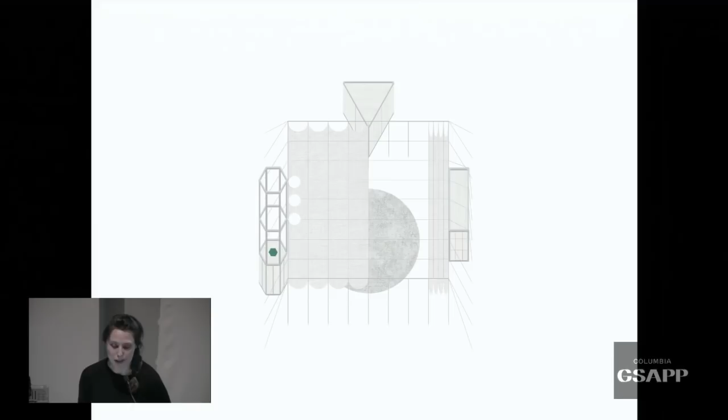The decorators designed pieces. As you can see here, these objects can open and scatter pieces of furniture around, which then populate the space for different activities. The roof can open and close.

So at night, that would become also the screen for the light to come through.

So this is the distillation tower, which is a bit of an ambiguous object. On one side it's a landmark visible from very far away, then it's like a chemical laboratory where everything around the festival happens, and it's also the support for the lamp.

This object closes at night and becomes totally white, and when it opens, it reveals the color. The same is true for the other objects.

So here you see the relationship with the essential garden that was created in front of the pavilion, which nourished the festival itself as a primary material.

During the festival, a lot of things happened, like essential plant courses about how to cultivate them, use them, distillate them. The roof could open and close according to weather conditions. There were also kitchen courses and classes.

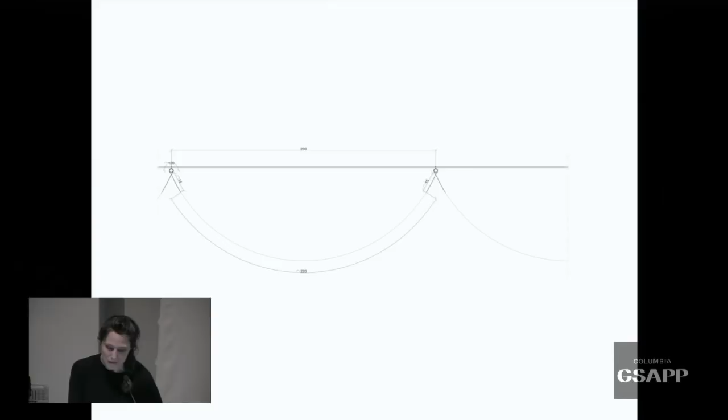So, in a way, to go more in detail into that, the elements are just this roof with this perimeter. The roof is this white fabric, very simple, just to protect from the rain. It has few features in the sense that as a white element, it looks really like a cutout. So it really cuts out the landscape from the inside. It really becomes like a view.

And at the same time, while being a fabric, it's very much alive. So it really reacts to the weather conditions, which is also very nice.

And then there is the kiosk. The kiosk is a reinterpretation of the former one, in a way that it had to become more stable, for obvious reason, because it has to be dismantled and rebuilt every year, but also built in very little time. So it's really done with these panels, which are just attached to a very thin metal structure, and these panels are framed with a metal frame, which then defines the drawing of the pavilion.

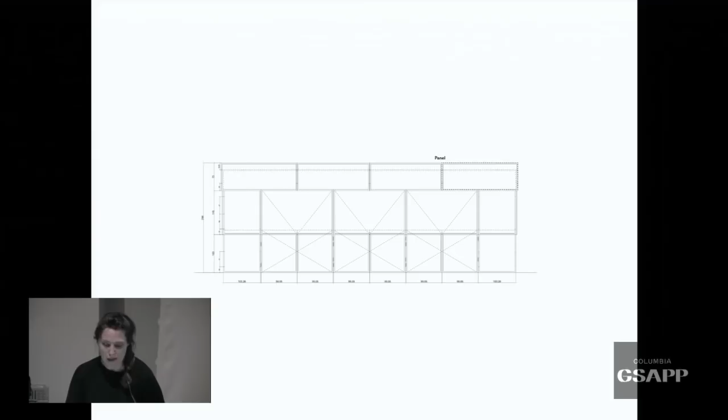When it's closed, it looks all the same, and then, as you see here, the pavilion opens on one side, and the bar comes out. So you see it here in the blue pavilion. It really changed a lot, the fact that there is this intense color on one side. It really gives something else, which makes the difference from when it's open to when it's closed.

And inside, every single object, even the sausage, is colored in the same color. Here you see also these both details.

The roof was really manually done, very much low tech, so that to open it and close it, you would need a few people on one side and a few on the other, and these cables would be the way to move it.

So the back of the pavilion, but here you see also, so there is the roof, there is the canopy, the kiosk, and then there are a few little features, objects which populate the space.

Here, the lamp as a landscape, which substitutes as a landmark for the tower of the previous festival pavilion.

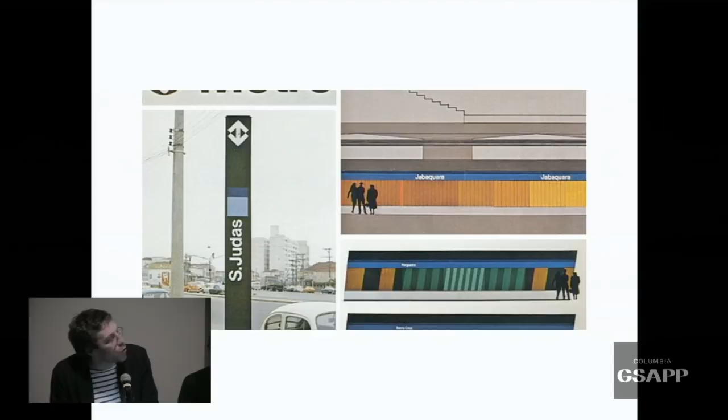This project had a big success, the project of the Milano Metro, because Bob Noorda, as a designer, was then asked to design the Metro of São Paulo in Brazil. And you can see that despite more Brazilian colors and patterns, the project is quite similar.

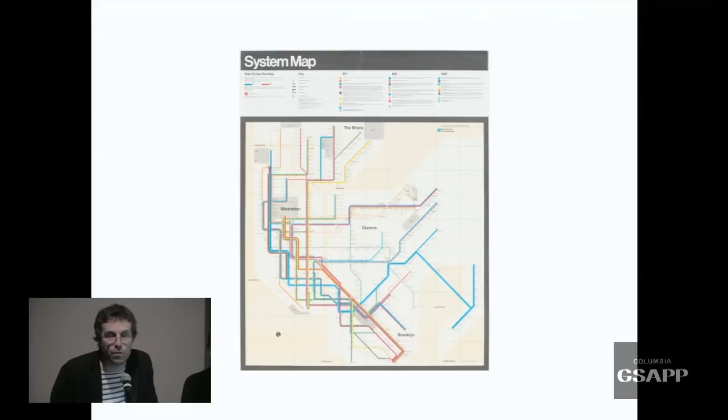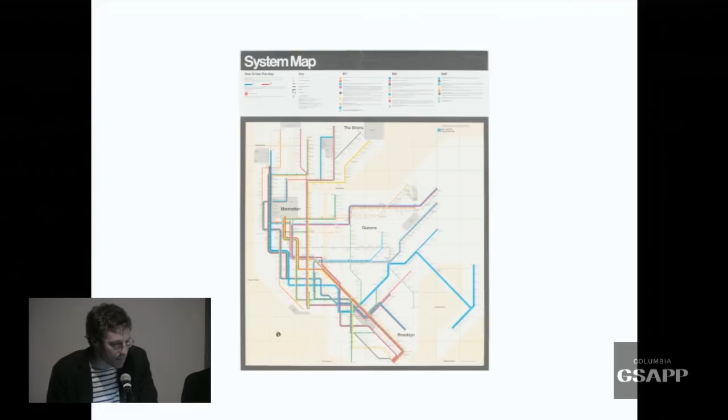And to add another little step to this, Bob Noorda, together with Massimo Vignelli, founded the Unimark International Office. And the reason why Unimark Office was asked by the MTA to design the metro map of New York was because of Bob Noorda's work. So if you look carefully, you see many assonances among this project, the project of the metro you take every day, and the initial metro of Milano. So for us, that project, the Milano one, is extremely important.

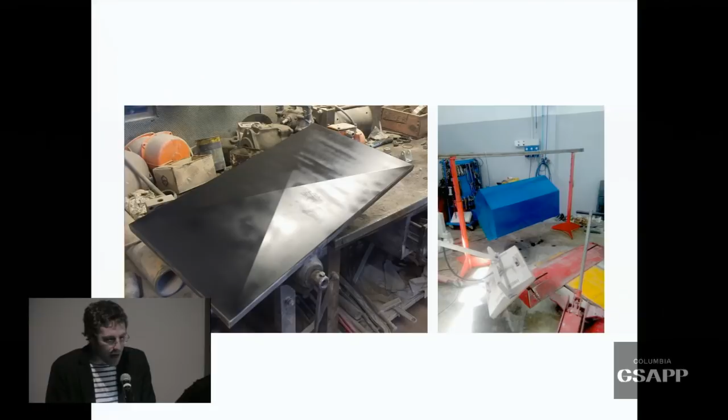We found another material we liked very much and were interested in, used only in one station for historical reasons—this blue embossed metal panel—and out of that we made the project of a small cabinet.

And then to finish, the signature railing of the Milan Metro, which is really the signature of the Albini Helg project—this red line, part of the first red line of the Metropolitana Milanese, which brings the user almost to the train, always ending with this special curve. Out of that, we decided to create a lamp, and this is the project of the lamp.

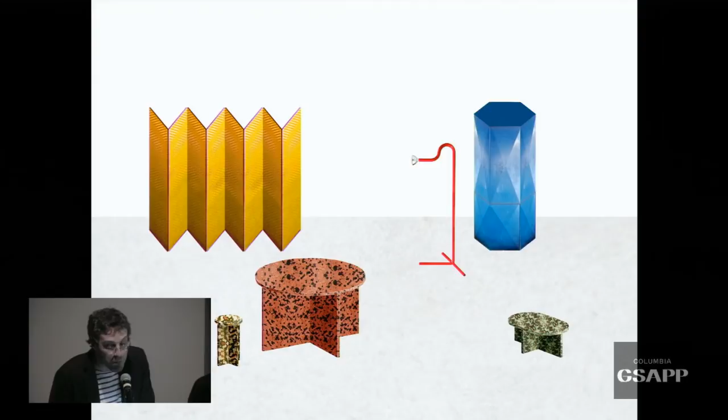These are the family, let's say, this series of furniture which somehow condenses this urban project of Albini, Helg, and Noorda into a sort of domestic environment. And this is the project in place in Chicago, how it was realized, together with a good company of Point Supreme's Totem on the back, which I think is not a coincidence—there were some resonances between the two.

The lamp, together with the pictures by Giovanna Silva, the survey she did with us in the metro, the lamp, together with other objects, the folding screen, the table, and the cabinet.

We are extremely happy about this project, about the result, which we finally saw only in Chicago. And we are happy because these objects will be realized again and distributed by the Maniera Gallery in Brussels. So somehow the Biennale project found a sort of continuation afterwards.

Actually, the reason for this Maniera collaboration came from another project, a much smaller one, which almost with the same timing made us work together. In the fall of 2017 the gallery was invited by an Italian institution connected with the Torino Art Fair to be present with some designers they had to select—in this case, us.

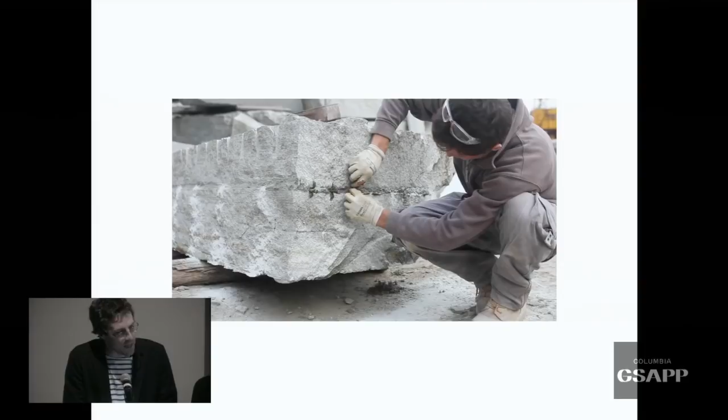This is how the stone comes to the stonecutter's atelier, in big blocks, and this is how they open it. First they have to break it manually, putting in some wedges which expand and make the stone break at its weak point. And this is the stone where it breaks.

What we were interested in, having spent some days there, was the quality of the stone specifically in the surfaces which were manually cut. Normally those surfaces are discarded by the stonecutter because they're not perfect—they just saw the block and discard this part.

The result is this surface, which because of the break, is extremely bright. It contains a lot of metal, and it shines under the sun. When you cut it with a saw, the stone doesn't shine anymore. So we were extremely interested—we had to work hard to convince the stonecutter to keep this surface.

In order to make a set of objects, like a set of monolithic pieces, we were interested in working this block almost as a set of geological samples—like what you get when you dig the ground with a machine and take out a cylindrical piece of earth. So we wanted to take this block and excavate it somehow, keeping the quality of the upper surface while also excavating the legs.

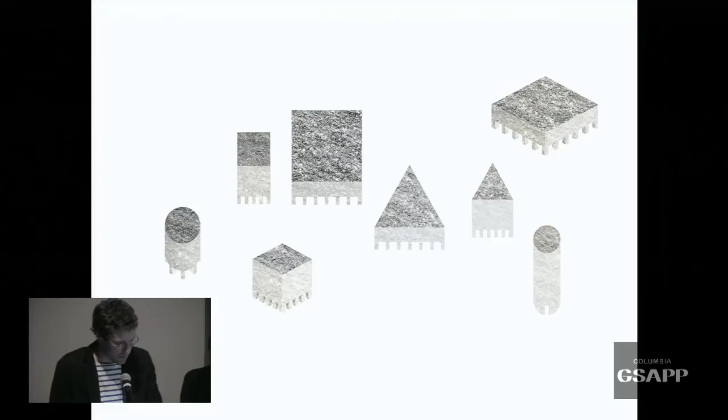I'll show you some pictures. This is part of the work. And the way in which this monolithic object touches the ground is also worked out of the same block—it's excavated out. This set of volumes, when put together, somehow twist into something else.

We like to think of them almost as micro models, or as micro buildings. So when we did this project, we thought about how they could compose an urban environment, even at the small scale they are.

These images show a little the difference between the upper surface, which is bright, and the surface of the sides, which is cut with the saw and shows all the layering of the stone. And this is the bottom of one of the pieces.

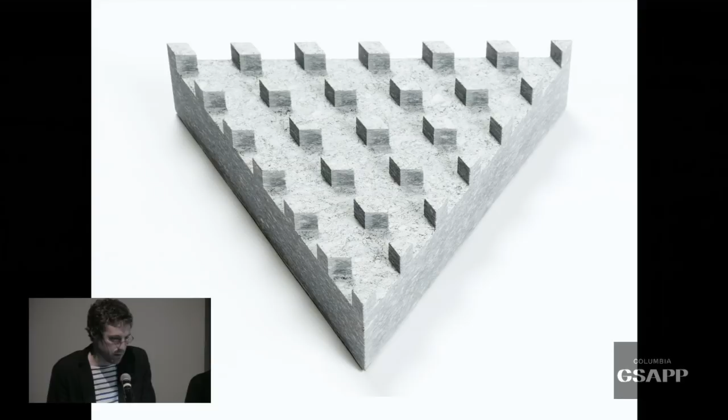So here we are going to introduce this project, which is an ongoing project, which we are going to present as a finished product by June, more or less. So here what we are showing is the first approach to the project, which was a competition that we won 2 years ago, I think.

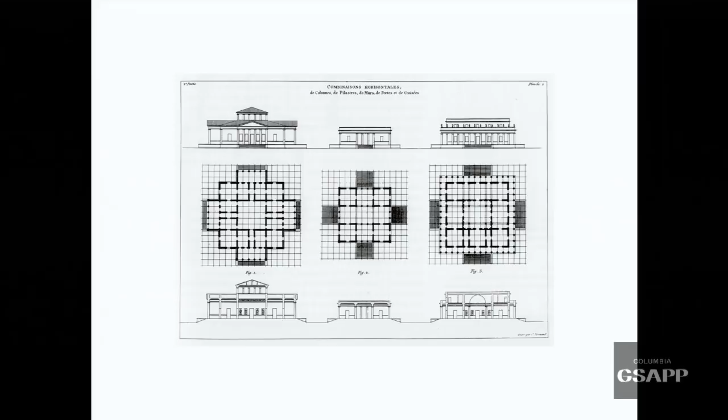The project is, in a way, how to build a house as a product of industry, and it's a very strange question because the question is how to build a house which doesn't have a context yet, doesn't have a place yet, and what to do with that.

So it's a house in which, to make it, you have to focus on the inner qualities of it. The project is, in a way, research on types and how these types can evolve, compress, expand, how they can adapt, and what this type is, and what are the inherent qualities of the spaces we create.

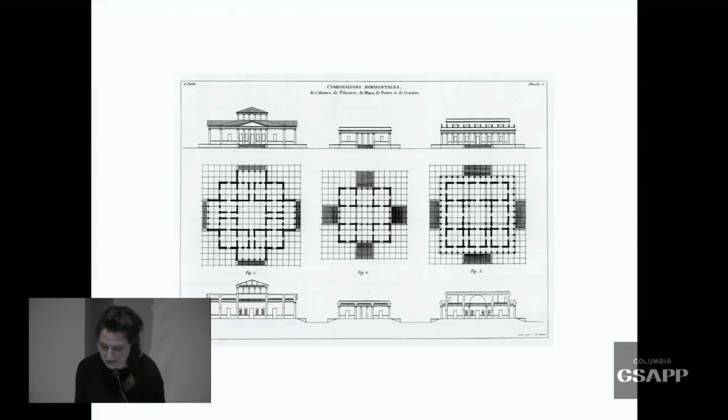This is an image of Durand, Les Précis des Leçons d'Architecture, and it's just a starting point.

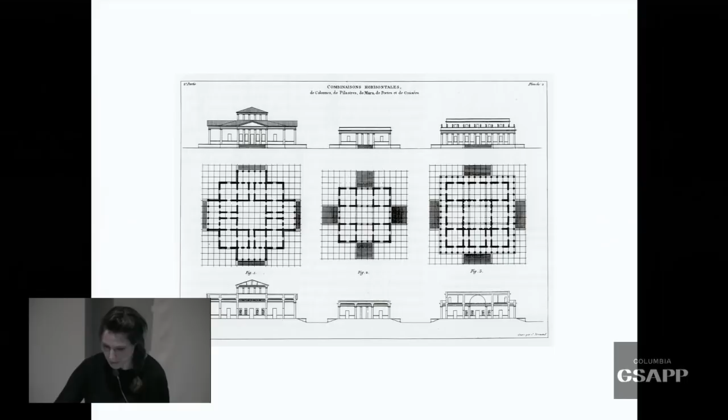Mainly, also to make a prefab house which doesn't have a client yet is an open question, because it doesn't really have qualities yet. You don't know what have to be the qualities of this space. It cannot be so specific, because this house has to be prepared for an X client, and we don't know what are the questions behind that.

So for us what was important was to create a space which we call neutral space, a space which is big enough and simple enough to host whatever. It's a space which, in a way, can be transformed through time. Also, if the house evolves, if someone else comes to live in it, it can be a space that takes other functions, and can also host the same functions at the same time.

But to do that, you also need to create spaces which are very defined, and that also inform the neutral space with the basic uses of the house. These spaces we call the edges, so the borders or edges.

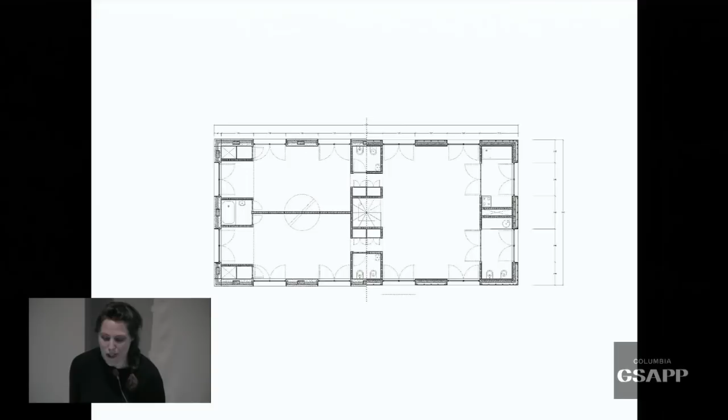And we imagine this house to be the connection of two spaces: a space which is very undefined, and spaces which are very compressed on the border of it, which are really specific, so which at the end could be kitchens, bathrooms, but also beds. So this is the first typology we had done: two big spaces, and in between, these spaces were always framed by these other smaller spaces.

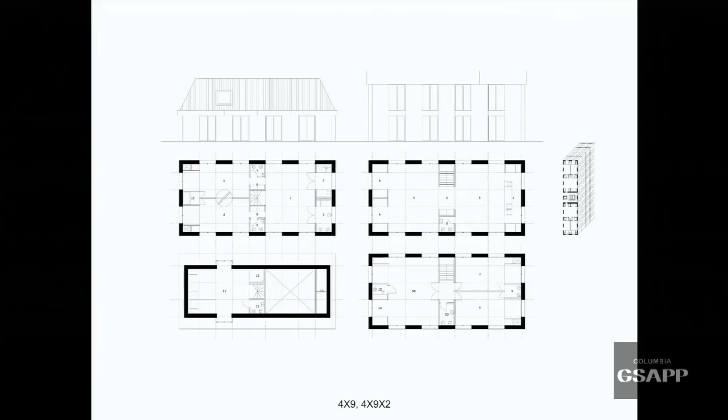On the roof, another space, of course, bedroom. So it's just one floor plus roof, but this, which you see on the left, could also become two floors. So the same room, the same typology, which has the peculiarity of facing two sides, could be one or two floors, with or without roof.

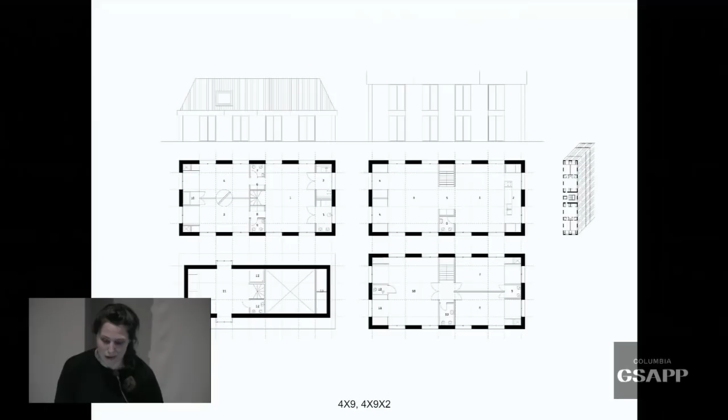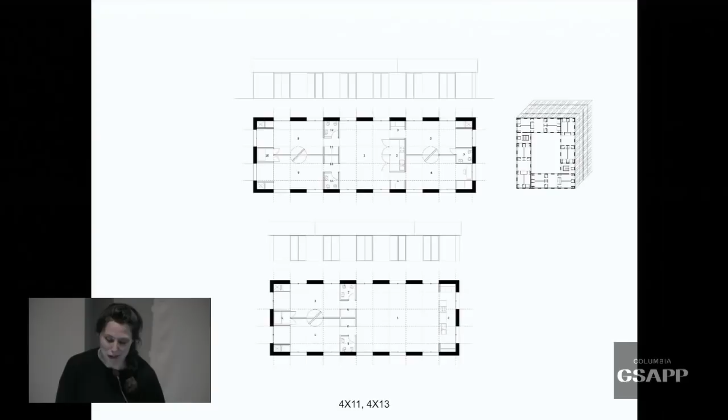It opens possibilities. On the right you see these small buildings. It could even suggest that it could become a bar, a building, made out of these typological apartments. So this is the expanded version of it. Instead of two neutral spaces, we have many more, smaller, bigger, very on the lower part, a luxurious house with a gigantic space and smaller spaces on the side, or a symmetric one. So just investigation on what this idea could bring to.

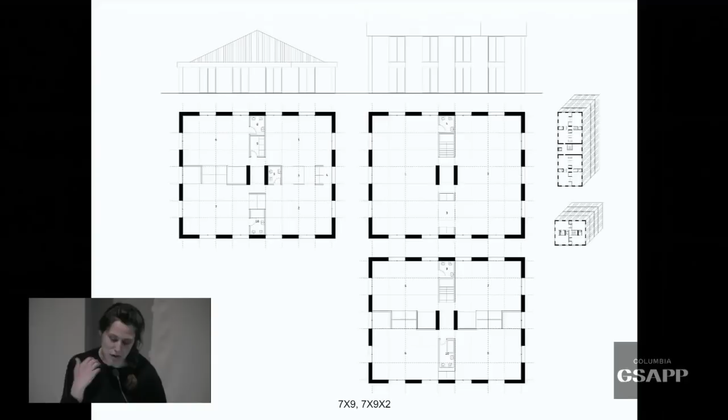This is the cross type. It's a big space which is organized on a cross, and which could be one floor, two floors, create a tower, create a bar. And then the mono-directional one, which would be possible to build towards a wall or with a very main view.

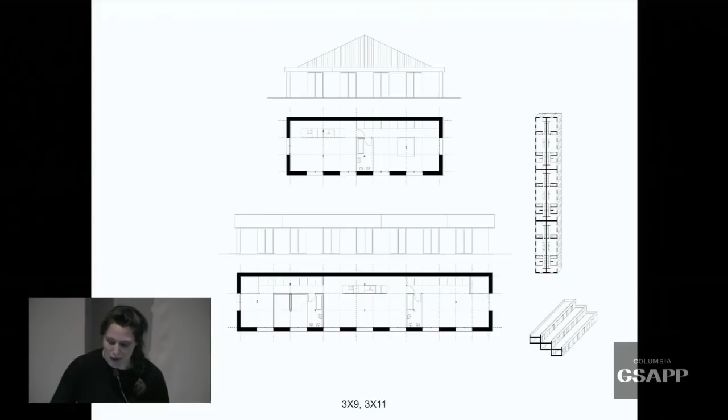This could also evolve in the same way, so it would have these edges on the back defining and dividing the main spaces. And this could also become, if you think about it, putting them together, housing on a slope, or almost like a fabric of buildings.

This is a project which is the first time we present it, because it opened last week. So we also have very few pictures, and in a way we still cannot show it in its full use. It was a commission from the Beaux-Arts in Brussels on the occasion of their exhibition on Fernand Léger, which opened a few weeks ago.

And they asked, because of Léger and his period in which he painted mainly circuses, to make a space in front of the Beaux-Arts for circus activities, but in a larger term.

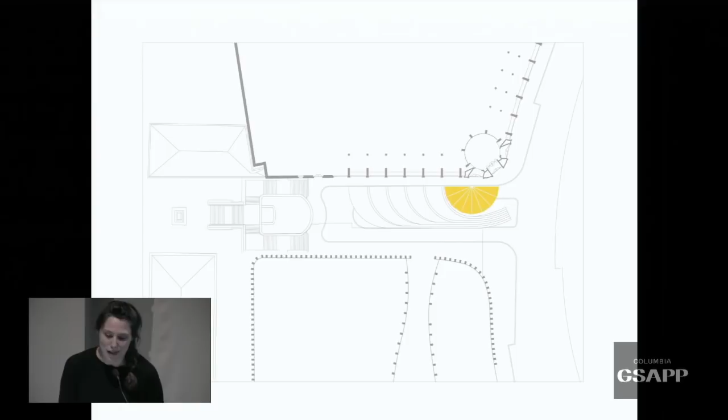But so, in a way, in this very narrow plot, the only solution possible was to make a half circus, which was fitting and giving this idea of grandeur, but not really being so big, fitting this narrow plot. And also because in this plan you can see the intervention which will come, the landscape intervention which will come in the next months, so even there it could fit in the leftover space of this landscape intervention.

So it's a project which, at the moment, has been built in this way, but in the future can be built again in the next phase of the plot.

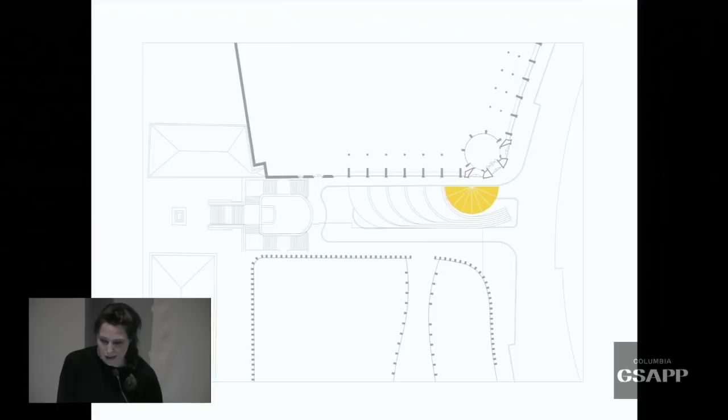So this is the structure. In a way, it was also very complicated. A circus always has these tension cables, but the site was such that it was not possible to put tension cables to build with this kind of structure proper to the circus. So the project became a structure which lays on its own, resting on a socle, a socle which makes the very sloped ground flat, and which also has very strong foundations out of concrete.

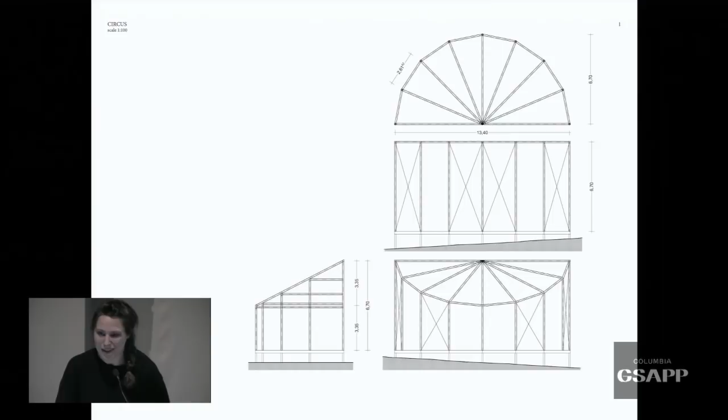Now I talk about meters, but okay, it's 14 meters, 7 meter radius. And then there is this skin which completely covers it, made of the same fabric as the circuses.

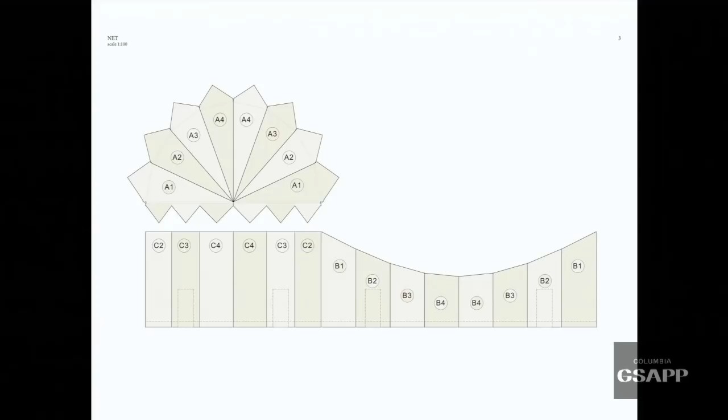So the question was how, with the smallest intervention, to create a pavilion which would give the idea of a circus, since the circus was not really possible to build there. So it was this half circus and this slope of the roof, and the fabric would be done in stripes, very light stripes, and we will explain later why.

Beside these stripes, there would be a few objects which would populate it, or express it more. So the entrance would be an enlightened entrance. The star would be the landmark to say 'I'm here,' and then some signals and so on.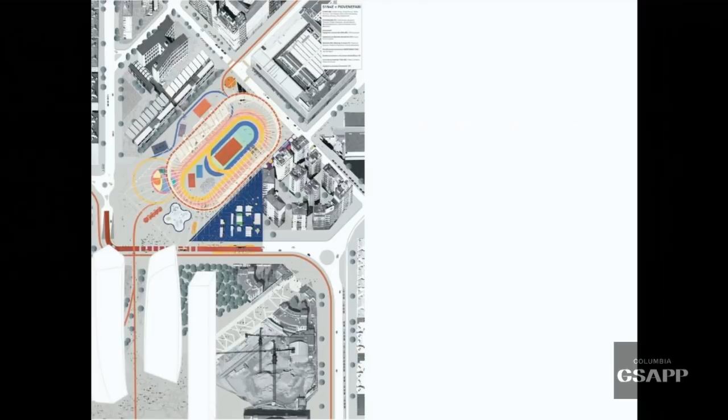So you see here the intervention, again here, the same school which is now connected. This is the inside of the stadium with the tracks we designed. As you see, the three towers here are the development I was talking about. And all these red lines are the official bike tracks of the municipality of Milano, which we connected with a series of other tracks we designed. So somehow official tracks become playful paths in this case.

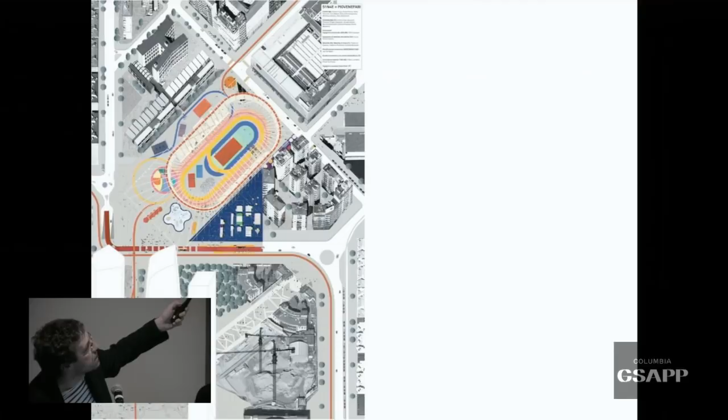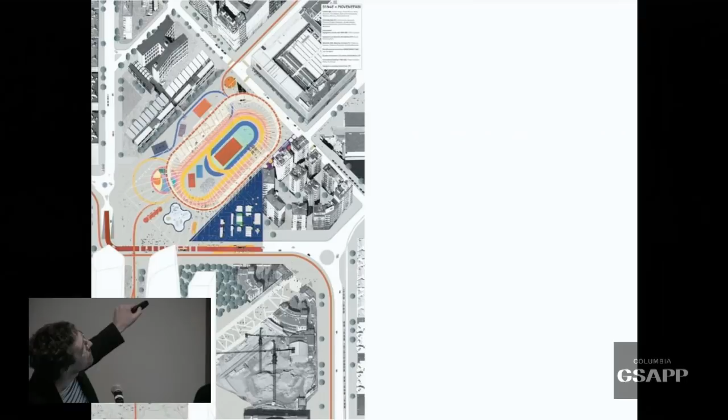At the same time, inside this stadium, there is still the possibility to do official sports. This is our idea, and this is a bit of the light. You see all the roof that covers the area. This is a zoom where you see what kind of activities we envisage.

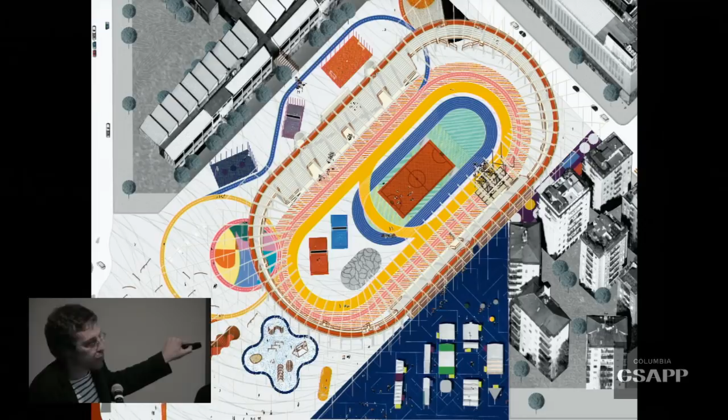So apart from the skate park, the playground, and the school, there's a kind of police school for the kids to learn how to bike on the streets of Milano, very dangerous streets of Milano, and inside all the tracks, and also an infrastructural area on the roof which could serve as support for small concerts, for example.

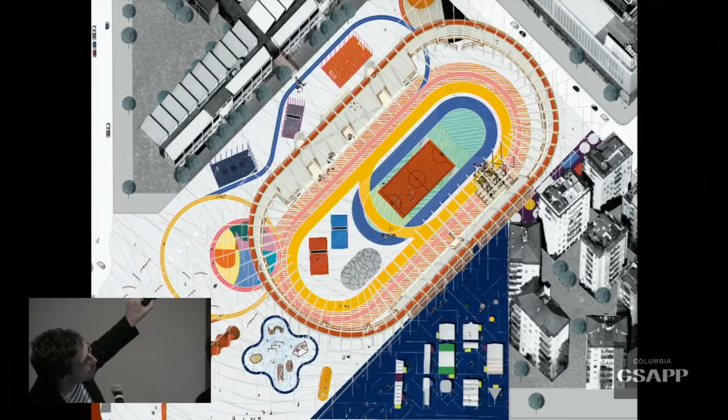And here the fields close by the school. So the idea was also that the school could get a new gym, a very big one, for the sports.

This is a zoom on the market area, also with a big project of diverting the traffic from that street to another street. We did this with some mobility engineers in order to really connect the public spaces.

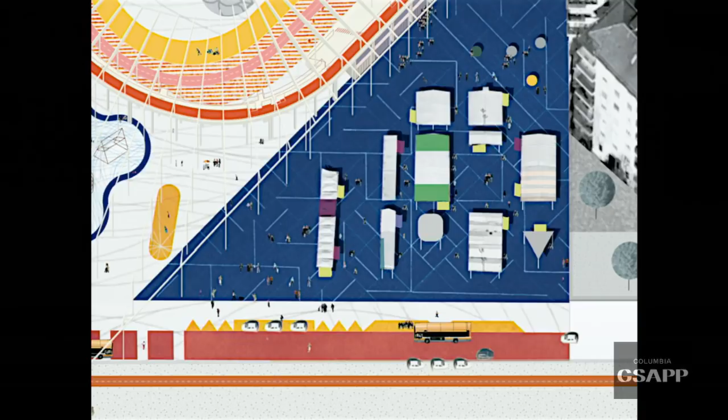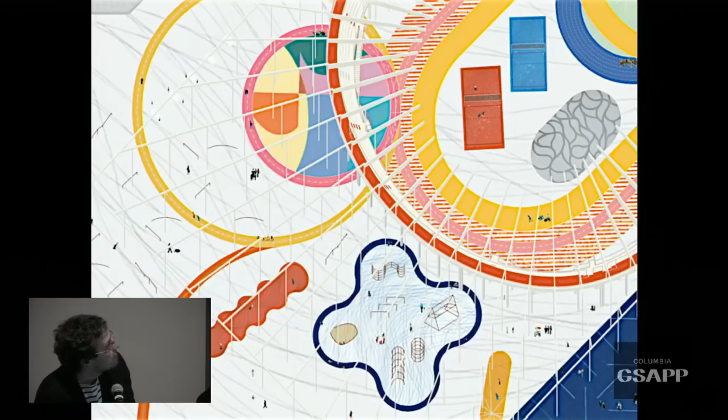The concert I was talking about, there, while there is a bike polo match in the middle of the stadium, and here again the playground.

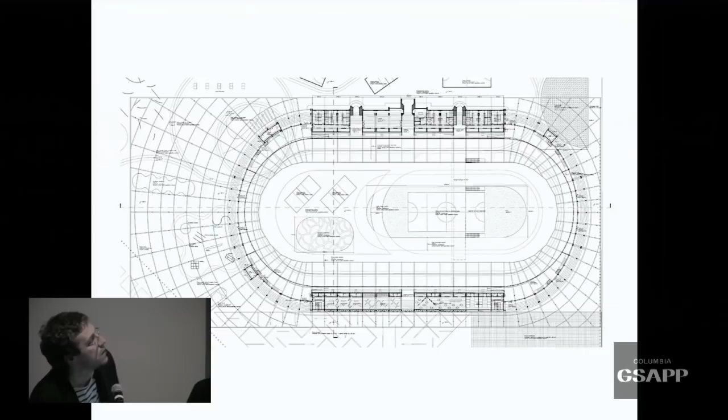So this is the plan of the project. Of course, we liberated all the curved part, so this becomes completely accessible, and on the straight part under the seats, we have foreseen on this side a gym which actually is already there - there is a very nice gym, an abandoned one. We provided changing rooms for the schools and for the city, so people who want to come there and do sports and start to run could use this area. A little hostel, a bike repairing shop, and a cafe. So this is somehow the social mix of activities that we have foreseen for the project.

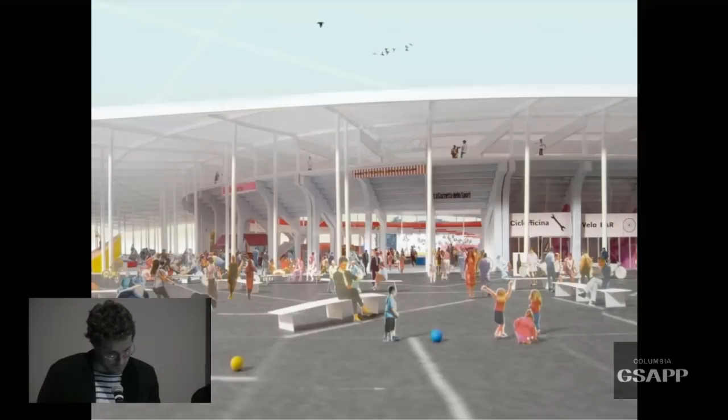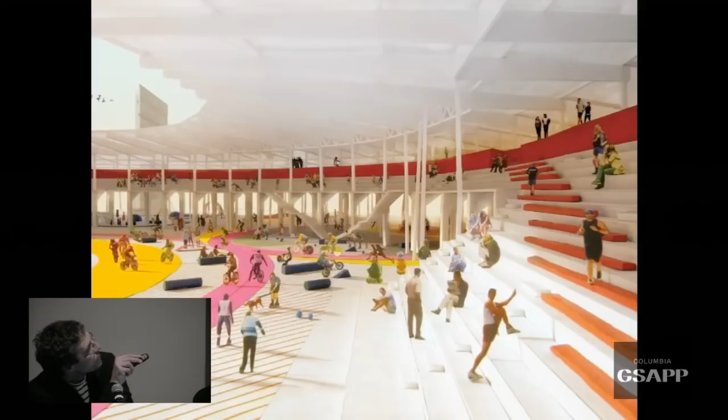And this is the inside with the tracks I've talked about before. So some official tracks and some non-official tracks that become kind of playful paths. But also this red thread here is a running track, a way to access a panoramic running track on the top, which runs on the top ring of the stadium.

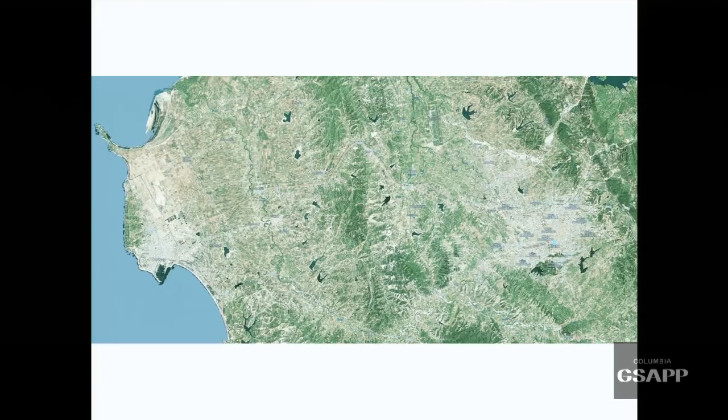And this is the wrong title for the project to come - sorry, it's not the Vigorelli Milano, it's an ongoing project we are working on in Albania. It's more a project which starts from a territorial vision, but the result is a series of small interventions.

So the bigger scale starts here - sorry, I did this wrong. Tirana, Durres, and then the road which connects the two. The road which connects the two is called Durana, which is a kind of never-ending construction of informal housing and illegal buildings. So if we go on here, that's the first stretch of road, which starts from Tirana.

So that was the piece in which we were in charge to work on. What I didn't mention before is the fact that what you see here is also a punctuation of lakes, which were not natural lakes, but artificial lakes, made as a production reservoir, an agricultural reservoir, during the communist regime.

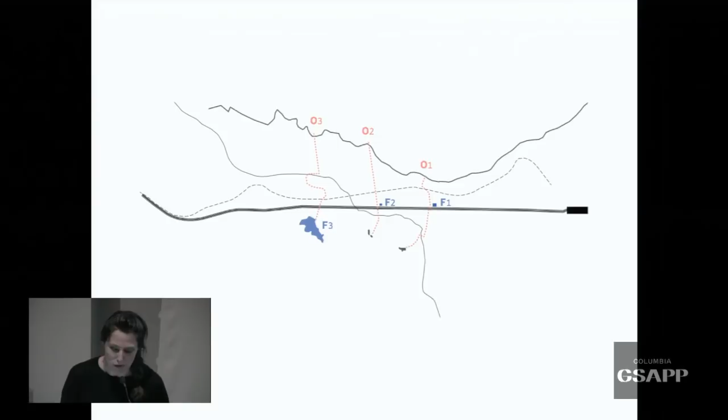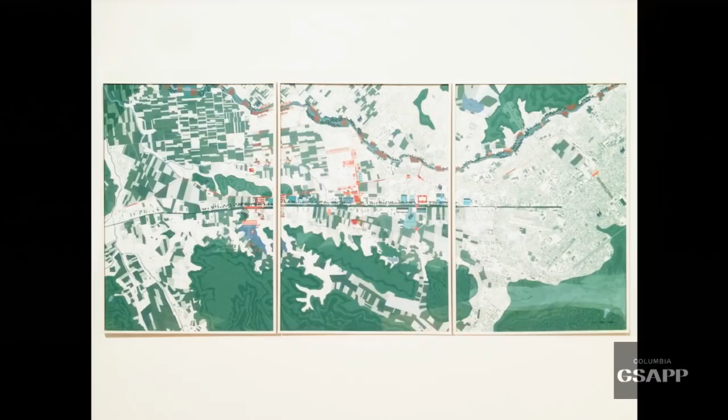What you see here in red are the possible interventions. It's a constellation of interventions on a rather small scale, which would allow this landscape to somehow be connected just by these small interventions—rather small public scale, maybe sometimes just adding a bench, sometimes a series of lamps, sometimes a pavilion, but always starting from what is already there.

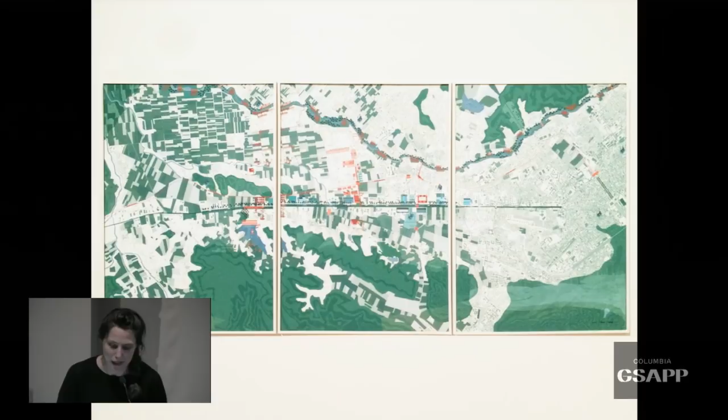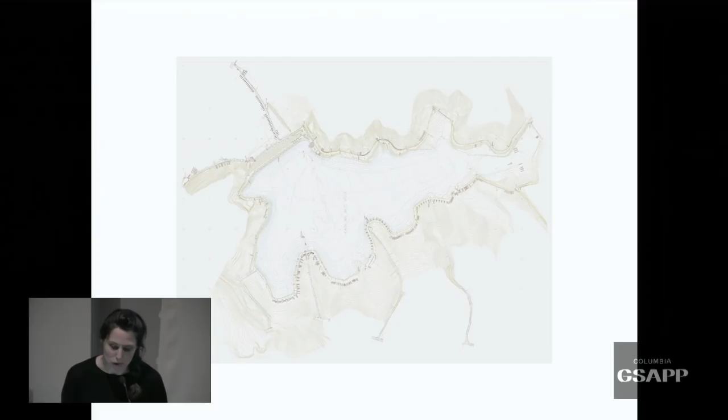So the project went on, but we focused mainly on the area around Kashar Lake, which is also one of these water reservoirs, to turn it from a productional lake into a leisure one. The project was to redefine a light path around the lake, and through a series of small pieces—like a beach, a platform, and a diving platform—to change the use of this place. Voilà, thanks.

Great. All right, well, thank you so much for a great lecture, and it's wonderful to see the work.

I have a few questions, and then we can open it up to the audience. Maybe picking up on a conversation we had earlier today, I'd like to talk a little about the way you're working, how you've established your office in Milan and now in Brussels, and about working in different places. We spoke about how you start working and your approach with sites between the offices and the locations. I thought it was interesting what you said about being able to work between places, feeling part of the scene in Milan but not originally being from there—important context for students coming from all over the world and approaching new places.